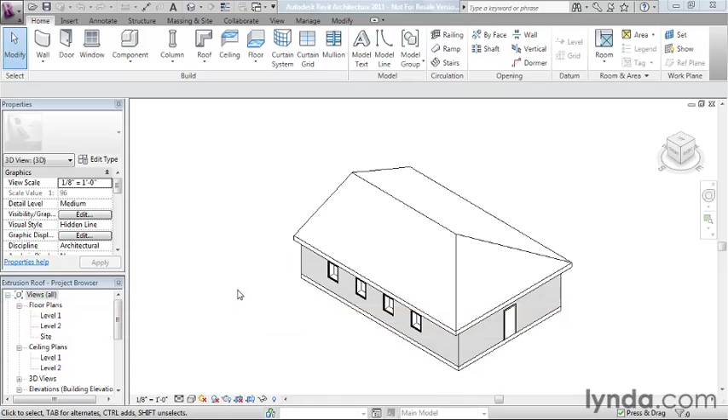Let's take a look at a simple extrusion roof in this data set. To create an extrusion roof, we actually work in a plane other than plan view. I'm looking at a three-dimensional view, and I'll hold down shift and drag with my wheel to spin this around. I have this little exit way over here, and let's assume the designer wanted to put a covering over that with something freeform. This is where we might choose to do an extrusion roof.

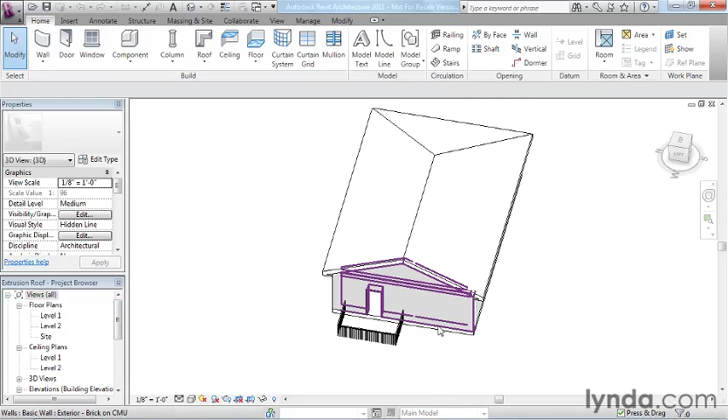To draw this extrusion roof, we're actually going to work on the surface of the wall, the one I have pre-highlighted here, rather than a floor plan view. I could work directly in 3D, but it's actually going to be a lot more convenient to work in elevation. So this is the west elevation, and I'll zoom in on the wall in question.

Let's start an extrusion roof. To get there, we use the drop-down portion of the roof button and choose roof by extrusion. The first thing Revit will say is that since we're not working in a floor plan anymore, we need to do a sketch. This is a sketch-based object, so it asks what plane you want to do your sketching in, because remember, they're just two-dimensional and work on 2D planes.

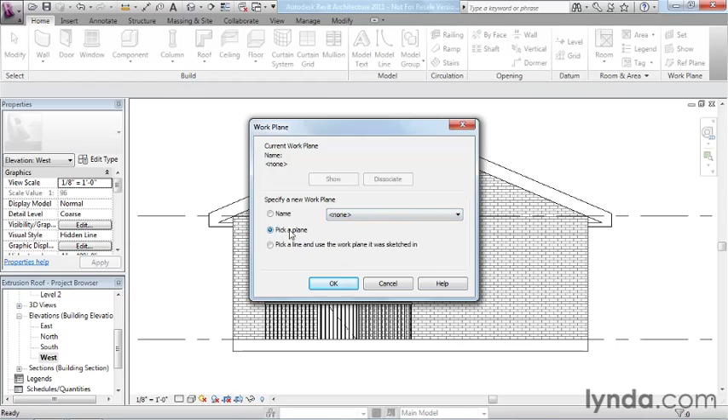So we need to indicate a plane somewhere to do our sketching. If we had a plane predefined, we could choose it off the list, but there are no choices there, so let's go with pick a plane instead. When you do that, you can move your mouse around on screen and see how it'll highlight pretty much any geometry. What I want to do is just highlight that wall right there, telling Revit I'm going to work on that surface.

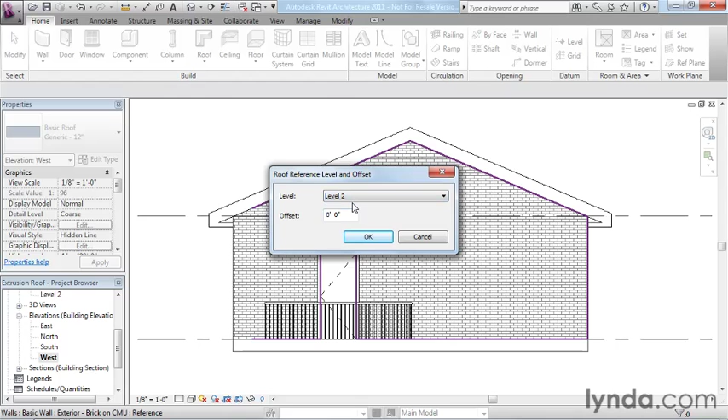The next question is, what about the height of the roof - what level should I associate it with? It automatically suggests your top level, and in this project there's only level 1 and level 2, so that ought to do the trick. I'll go ahead and click OK.

So next I'm in sketch mode. Everything grays out, and unlike the footprint roof we saw in the Adding Roofs movie, we don't have any pick walls in this case because we're not working in plan view and we're doing an extrusion. So we just draw the shape.

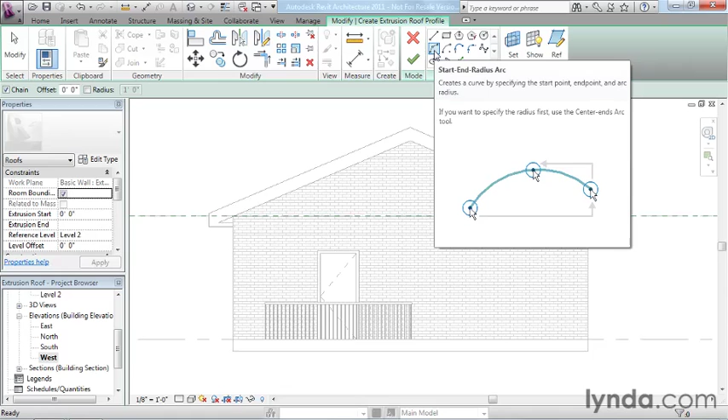We can draw any shape we like, but let's have a little fun with this, and let's let this also be our first time looking at an arc in Revit. Drawing arcs works pretty much the same way no matter what tool we're working in. We're doing it here in the context of a roof, but you can use the same technique to draw any kind of arc shapes.

So basically, you click anywhere for your starting point of the arc, then anywhere for your ending point, and you can see the arc appear. Your next click determines essentially the radius - you pick a point somewhere along the curvature of the arc itself, and that gives you the radius.

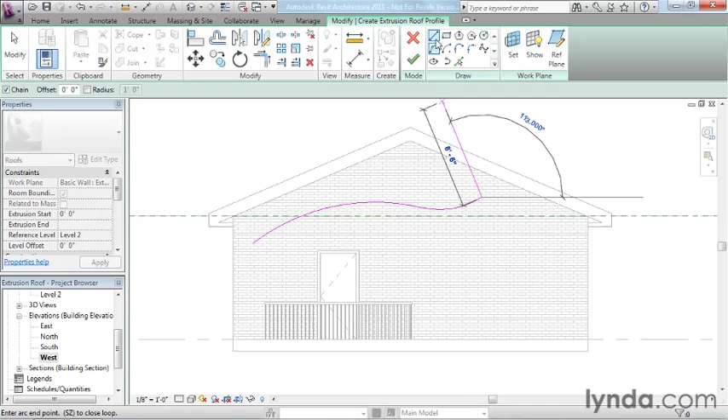You could stop here with just that single curve, or create a second curve, and notice Revit will even look for things like tangential relationships. You could switch to lines and draw additional shapes starting at that end point, maybe going out horizontal, whatever you want to do - so it doesn't have to be just one shape, it can be multiple shapes.

The thing that's very different about this sketch versus either the floor sketch or the footprint roof sketch we've looked at previously is that this sketch is not a closed sketch. Do not draw it around to make the total form - that will actually generate an error. So in this case, you want to leave it open-ended like it is now.

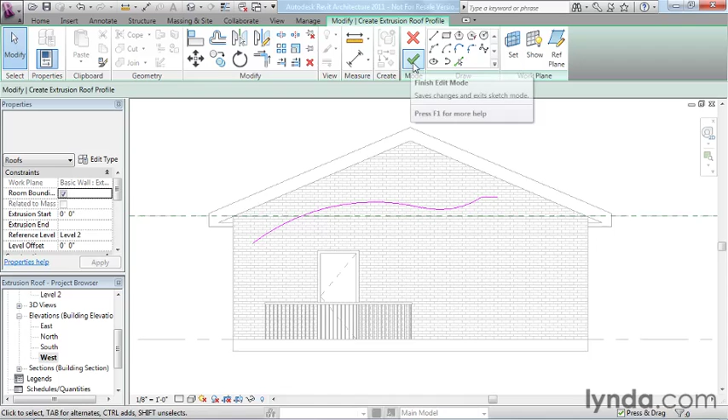When I click Finish, you see how the thickness gets applied anyway. That's because in this case I'm using the generic 12-inch roof, so the 12 inches gets determined by the thickness of the roof material. That's why we didn't need to sketch that.

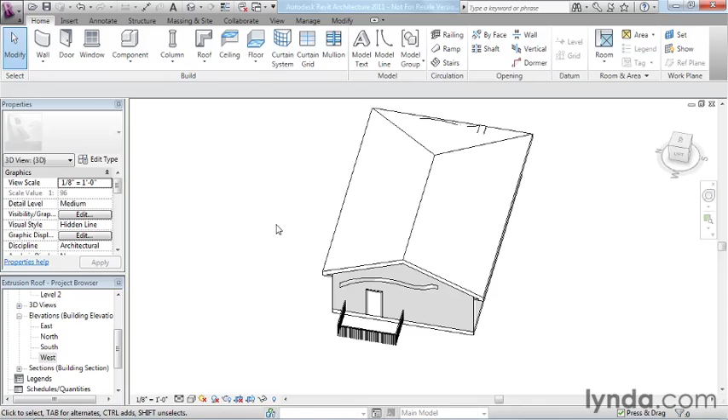Now it looks a little odd what happened here, and it's a little easier to understand in 3D view. I'm not really sure why Revit always does this, but it always goes the depth of your building - it just has to assume something rather than ask another question. And in my opinion, they always assume poorly, because I always have to come over here and select this and make adjustments.

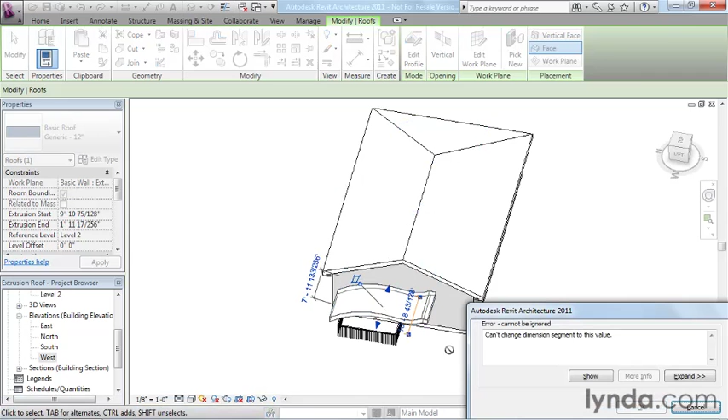Now I can do this manually with these little control handles at the end. I can type in numbers, make that 55 feet, pull this one all the way out here, make that 10 feet - whoops, oh I guess that's not a good value.

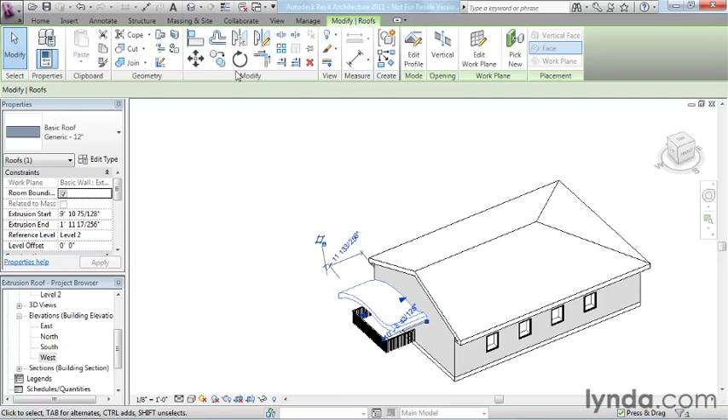Let me spin this around. If I can get it to a good angle, what I can show you is this may actually be the design you want, where it sits away from the building, maybe held up by some structure. But if you want it to actually attach to the building, we can use our Align tool for that.

I'm going to go to Align, and what's really neat about Align is it actually works here in 3D. I'll click the face of the wall, and then you see how it lets me highlight the face of the roof object, and it will just go ahead and stretch that for me - so instead of struggling with the grips, Align will do a much better job.

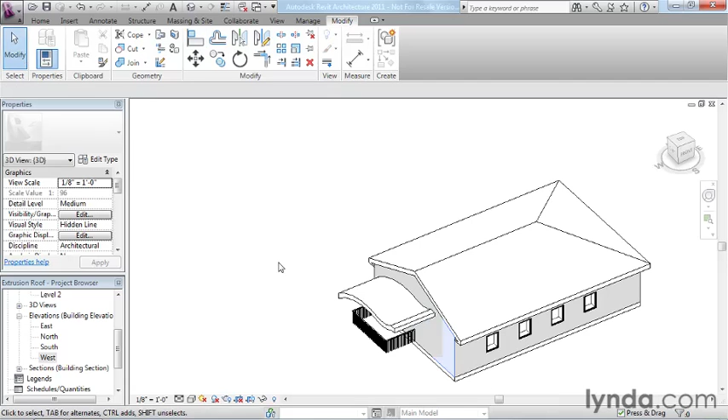So there you have it - that's an extrusion roof. You can use it for any similar type shape, barrel vaults or undulating forms like this. Simple sketch, and you're good to go.